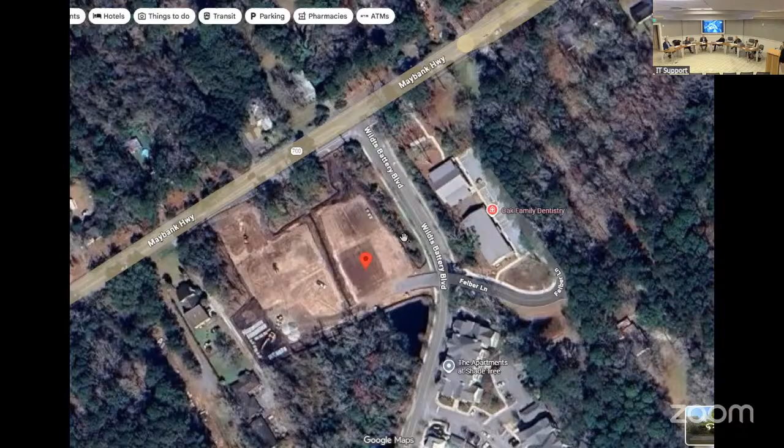Turn over to the presenter. Thank you, yeah, so this will be short. My name's Hunter Thurlow with Leo Project Architect, and I have Jay White with Leo, Beth Brownlee, and Matt Candy with the City of Charleston.

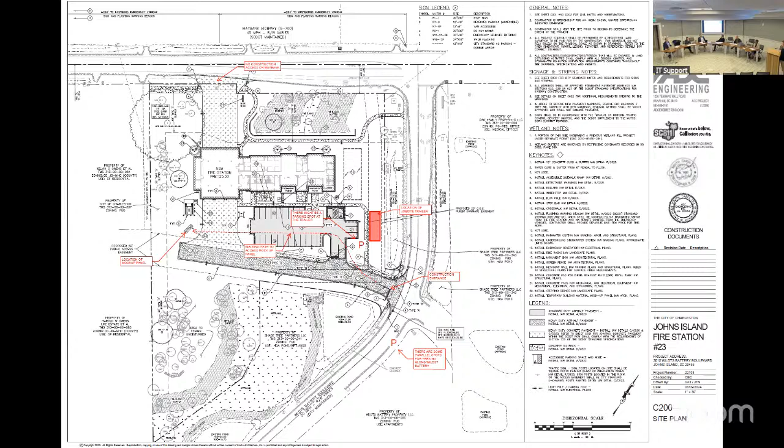I hope all of y'all were able to make it out onto site over the holiday weekend and review the mock-up panel. If you want to skip - okay, some good pictures, additional pictures you all find as well.

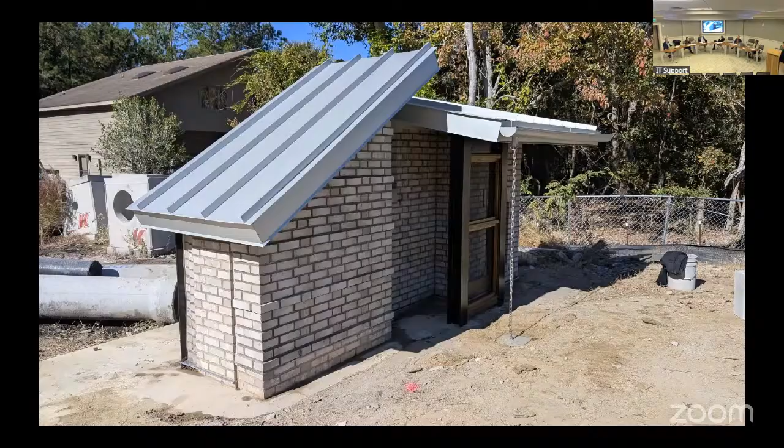We can skip. So just to describe the mock-up briefly, on the left is mimicking the apparatus bay with the steel plate on the far left for the door detail. Then we have the screened porch mock-up with the rest of the house on the right, that mock-up.

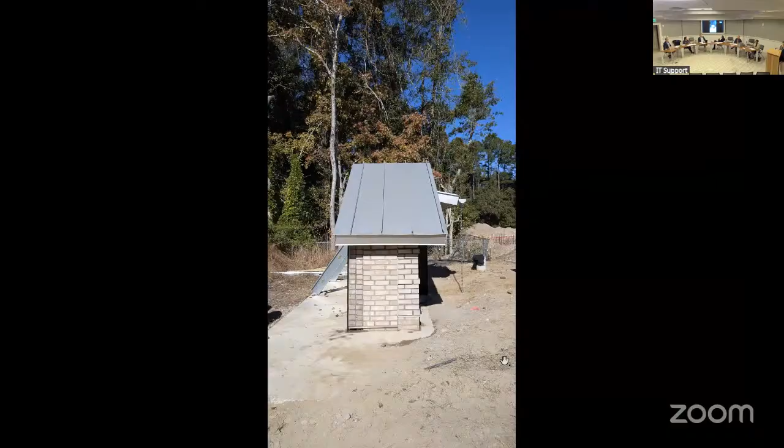I can just go through these if you like. Let me know if you want me to stop or something. On the window detail, we do have the two different types, the double recess and the single recess. Those reflect different size windows, the double being the larger and the single being smaller 3x6 windows.

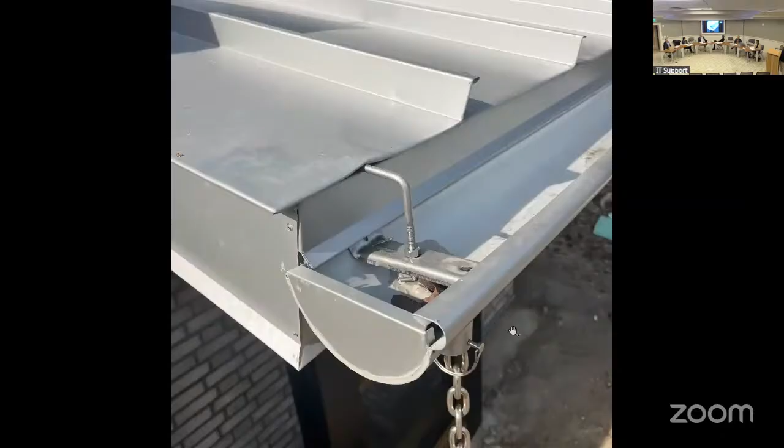Anything further? Yep, thank you. Great. Any questions from the board? Question.

Hunter, right? Yes, I stopped, yeah, right there. And David pointed that out. Thanks, David. Just questioning the attachment of the half round gutter to the building. Is that really how it's detailed, how it's intended to go under the standing seam like that? That's correct.

I've just never seen it done that way. Looks like water would have a tendency to go under that fish mouth where the opening is. What is the reason for that? It was to connect it to the top, mount it here, and then it's be flapped over under the roof. It was to not have visible hangers from the bottom from the pedestrian perspective.

And I guess you're just gonna seal right there. You're just gonna put sealant at that joint. No. Okay.

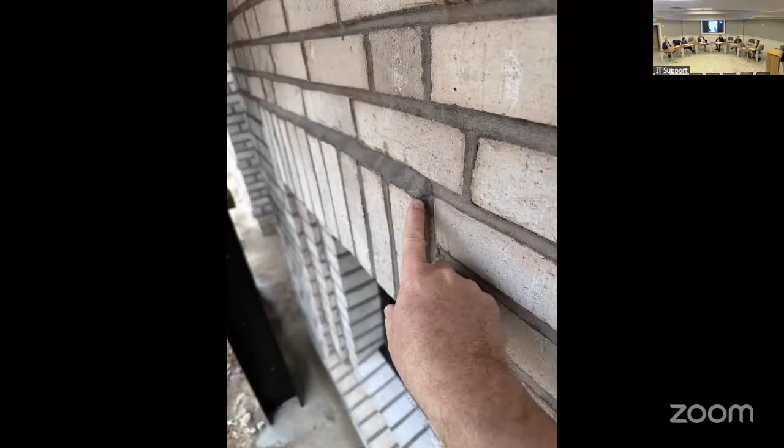So it's built out though. You said so the water doesn't splash back up and affect that, right? Water doesn't flow back into the brick, right around the window. That could probably be accomplished with something a little less dramatic in terms of mortar buildup. I'm not strong about it, I was just curious.

I had another mortar question. I'm afraid I didn't- okay, maybe you can see it on one of these, on that side. It looked like it was on the far side, far right, if you're facing it on the left. Is that a change in color in the mortar? Yeah, just at that seam. I was curious, you can't see it, but on the left side it was like one was beige and one was like a darker gray, and I didn't know if those were options or different parts of the buildings were having different mortar colors.

That picture was taken right after they had finished washing. Oh, no, I was there this morning and I took a picture of it. Yeah, there's a different mortar color around. Yeah, they're very different looking. We'll confirm with the contractor, but I've got all the consistent mortar, it all should be one color, as shown on the front. Yeah, I took a picture today that shows it pretty drastically contrasting, but that's what you meant right here, right? Yeah, I got there this morning.

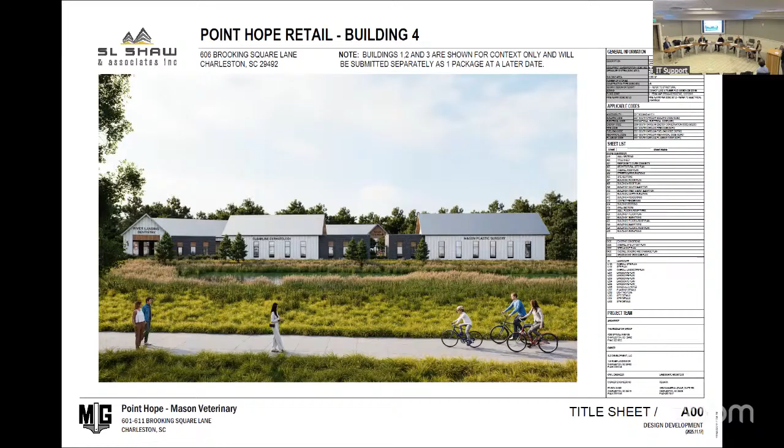If you move to the next slide, please, I'll start with our responses to previous DRB comments, and also include comments we received from the Point Hope DRB board. We have received preliminary approval from them earlier last month.

The first DRB comment was included in the motion. We were supposed to study the infill porch columns and beams in one of the 3 elements that each building has. We looked at the siding color, darkened it, and eliminated the post and beam look, using trim instead. I'll show you that later in comparative elevations.

On this slide, you see our proposed preliminary design at the top, the previous one at the bottom.

The other 4 DRB comments focused on landscaping, and we addressed those. We added landscaping at the entrance to the site, which you'll see on the landscape plans. We've also started coordinating with Design Works on the pond design. It's not on our property, but we'd like a complementary color palette, though that's still in progress. We've also included rain gardens at the rear of the site per the DRB and staff request.

If you move on to the next slide. Another request was that I think we added enlarged landscape areas, as staff requested in the landscape package.

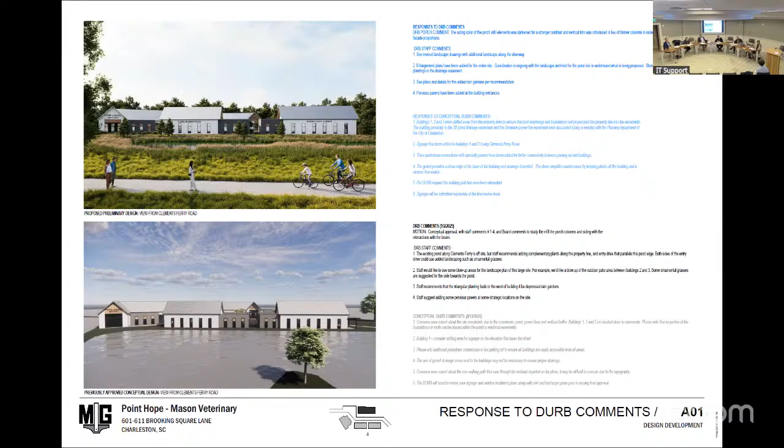The other thing we added was pervious pavers at building entrances. These are all the comments that we addressed.

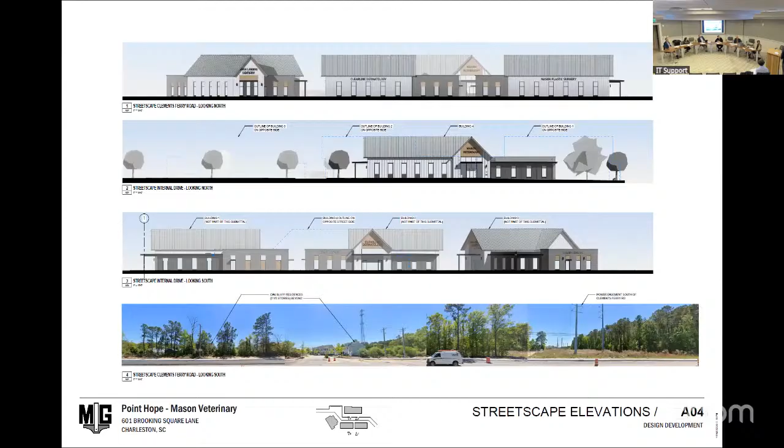So let's move on to other sections and materials. Next slide, please. These are the streetscape elevations that haven't changed much. Next slide. These are site sections that we included.

Here is building 4 at the rear of the site. We had to bring the finished floor elevation pretty high to work with the existing sewer elevation. So we have to deal with some topography on the site in a stem wall situation, mostly here on building 4, but we'll show you how we address that architecturally on the elevations.

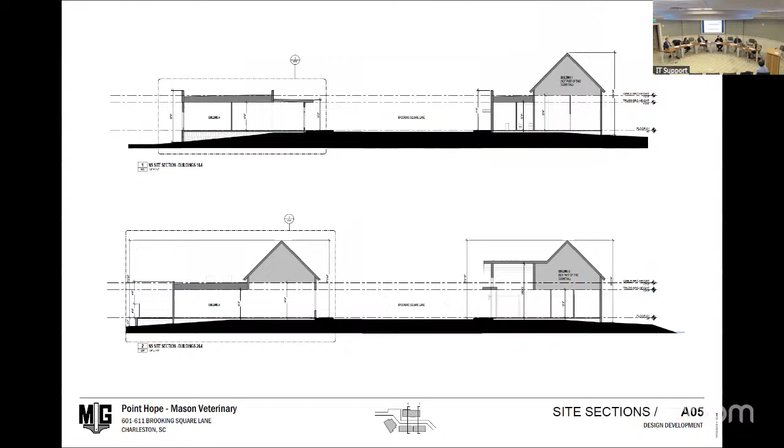Next slide. Here are the main materials we're proposing. It's a pretty neutral color palette of whites and grays with some accent wood.

So the gabled portions of our building design will have fiber cement siding with board and batten, and to give it a unique touch, we're using 1.5 inch by 1.5 inch deep battens to create a deeper shadow line and some more texture. And we have a gray brick. I can show these materials here.

A light mortar. Then for the porch infill panels, we're using V-groove siding. This is just a general material, but we paint it dark gray.

And at building entrances and other accent areas, we're using a Resysta siding that's been used successfully on other projects you've seen before. We're proposing vertical siding above the building entrances.

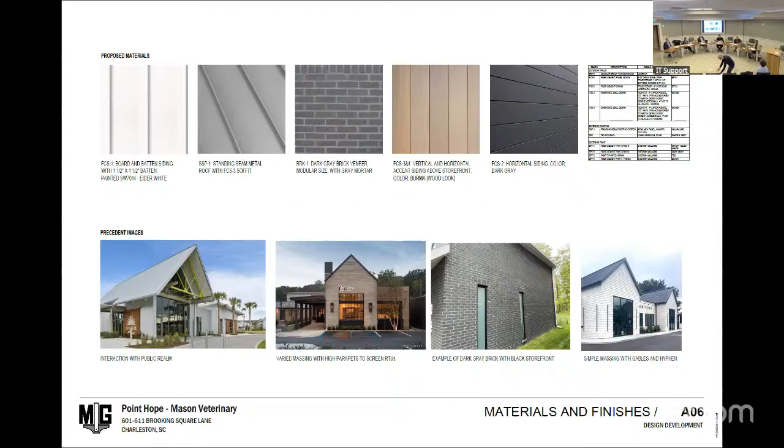We'd like to use different widths, 4 inch and 6 inch, combined randomly to give it a more rustic or organic look, since otherwise the colors don't change much in this composite material. It's also on that material board.

We're also using this material in areas where we can't have floor-to-ceiling storefront because of the medical exam rooms behind. So we're just using a 3-foot high sill infill that's still recessed from the siding.

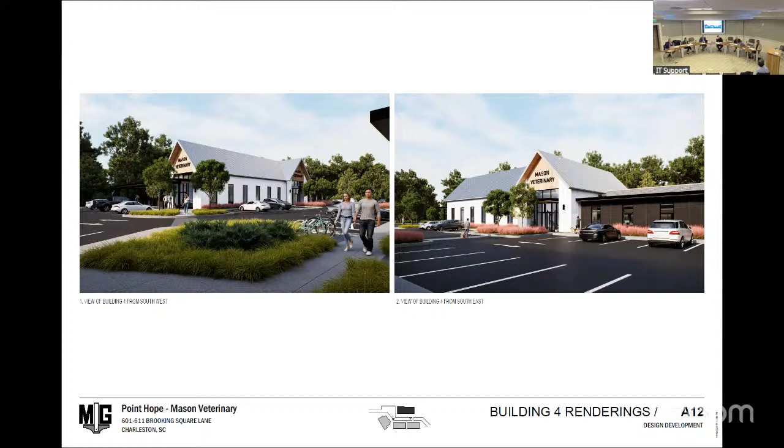These are just renderings of the elevations from the parking lot, and these are previews of how we're applying the materials just described to buildings 1, 2, and 3.

Again, this is not part of the submittal, this is just the context.

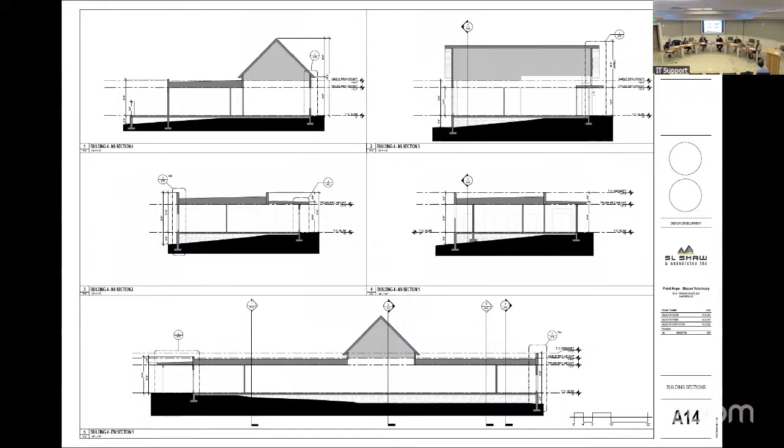Next, these are building sections and wall sections. Feel free to ask any questions if you have any on those.

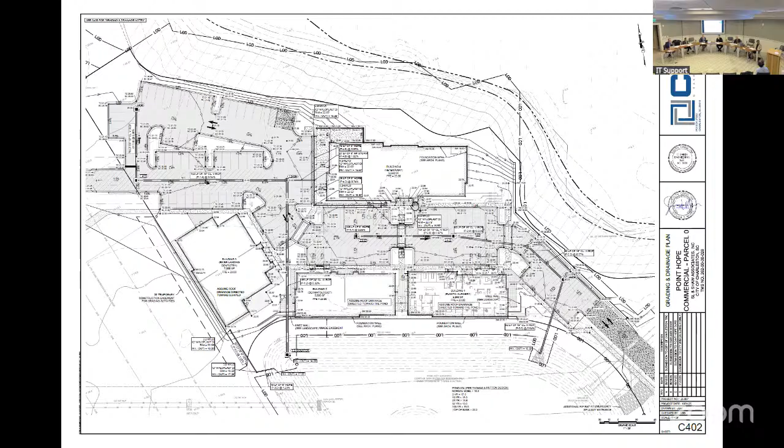If you have any questions, we're open now. We have civil and landscape here to answer anything I haven't covered. Thank you. Questions for the board?

The raised sill on the storefront for the exam rooms, is that spandrel glass in there, or is it an actual painted part, something like that?

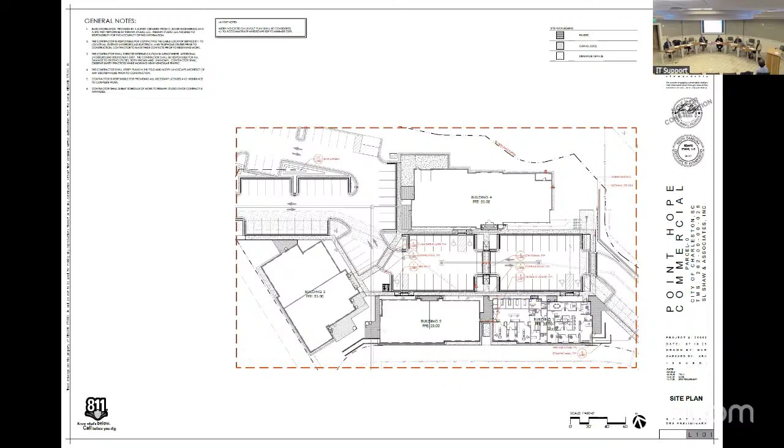At the bottom, this is actually the same V-groove siding that we're proposing on the right side. This is because it's a bed space and the dogs are not supposed to look out and get distracted.

So go back two more slides, please. This and this material is exactly the same material. The board and batten is slightly proud of it. So the storefront and the sill are in the same plane, and then the board and batten comes out of it.

How is that difference in depth achieved, just by the width of the siding, or is there actual framing? We're furring out the board and batten, and this is just the siding directly over the sheathing.

We show the dark color so it looks like the dark storefront. Just so you know, the other buildings have different medical offices with different requirements, so they may have this element at other heights too, but generally this proportion was important to us and that stays the same.

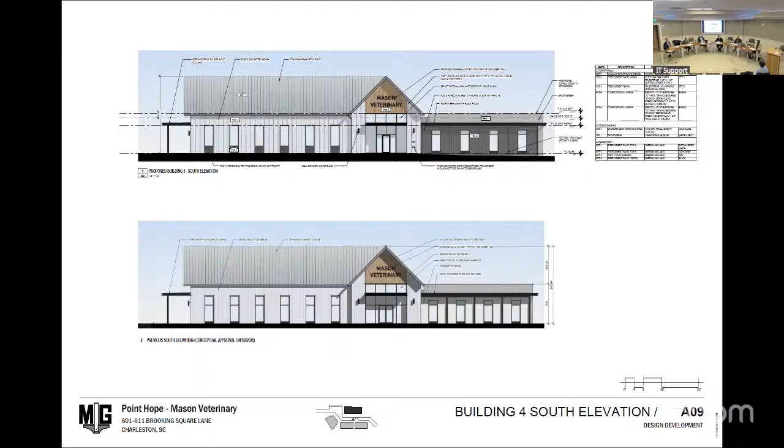Quick question on the site plan. We'll look to it, just a clarification. I think there's one that shows, yeah, the landscape plan is fine.

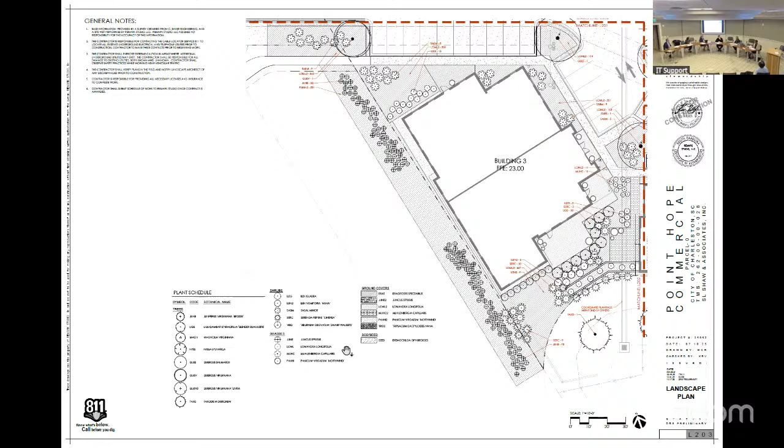I had a question about a fence coming in, maybe towards the entry. It looked like a fence coming in, and then if you go to building 4 landscape, it looked like there was a fence that came in somewhere and it just kind of ended here. I just wanted to make sure I understood what was going on there. Does it kind of end where that deadline is?

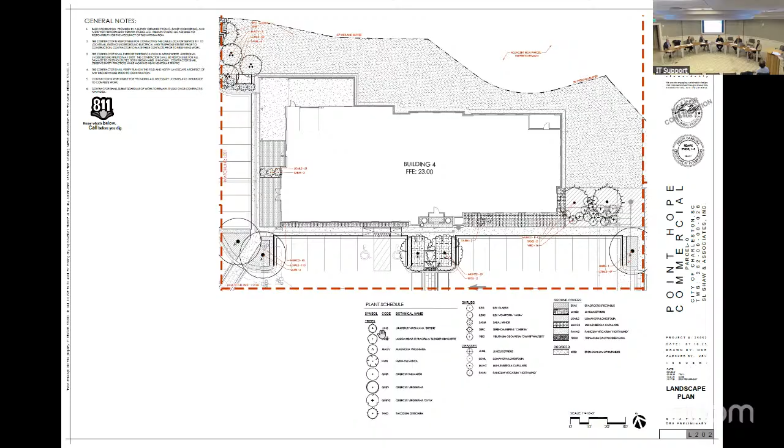We have a lot of grade makeup there, so it's difficult to see here. The landscape plan kind of showed that retaining wall hugging the driveway coming in. Since we've removed the nature trail from within the buffer, we've eliminated the need for the stairs and the extension of that wall. But this portion here alongside the driveway will still be necessary. Once we get closer to the eastern face of building 4, we'll be able to make grade without a wall. And there's a fence, I think it's a black aluminum fence along the top there.

Is that part of it? That is the vehicular guardrail. Okay, and then what, does it just end right before you get into the main pedestrian area near building 4? So it's a guardrail, not a fence. Correct, it is vehicular protection.

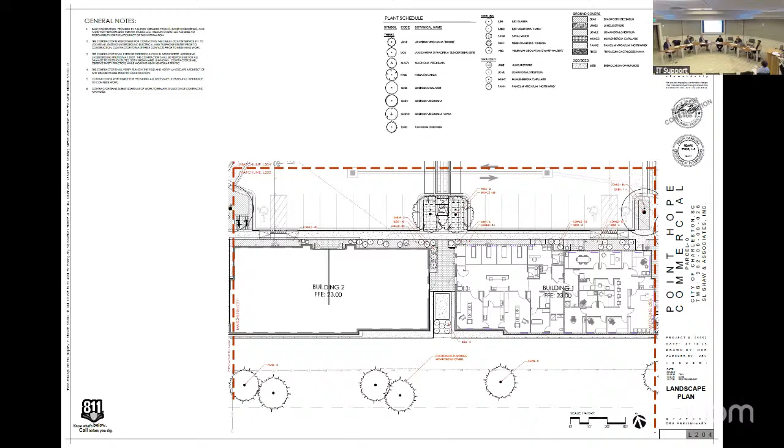There was a fence detail, I thought. At one point we did have a fence because it was pedestrian adjacent to it, but the trail went away, so the pedestrian access also went away. Well, it still showed up in some of the drawings I saw today, so I was trying to figure out what's ending up being there since it had changed. I don't know exactly what sheet, but it had the fence line, and I was trying to see where it ended and tied into that planting bed or not, and how that worked. Understood, the goal is safety, so we'll be sure to rectify the details accordingly.

And then the fence will not connect to the building. That's correct. Okay. It looked like it followed that line right there, that wasn't the plan I was talking about, but just kind of, okay, thanks.

Any other questions from the board? Okay, anyone from the public here to speak on this project?

Staff recommendations, some staff observations. The previous board and staff comments mostly had to do with the site, and these have all been addressed. The landscape plans are looking good. Staff appreciates the added rain garden in the parking lot. The board member who made the previous comment about the porch columns and siding versus the beams has confirmed this item was also addressed. DRB supports the materials for the building as shown on sheet A06.

Staff comment number 1: the variety of sweet gum being specified has less messy fruit than the standard sweet gum, but they still have some fruit. Staff recommends a different tree choice directly next to the patios, but other locations for this tree would be fine, as long as it's not located next to walks. Staff comment number 2: please include the common names in the plant list. Staff recommends preliminary approval for building 4 and conceptual approval for the planting plan. Because the plant numbers aren't included yet, that should be included for preliminary approval.

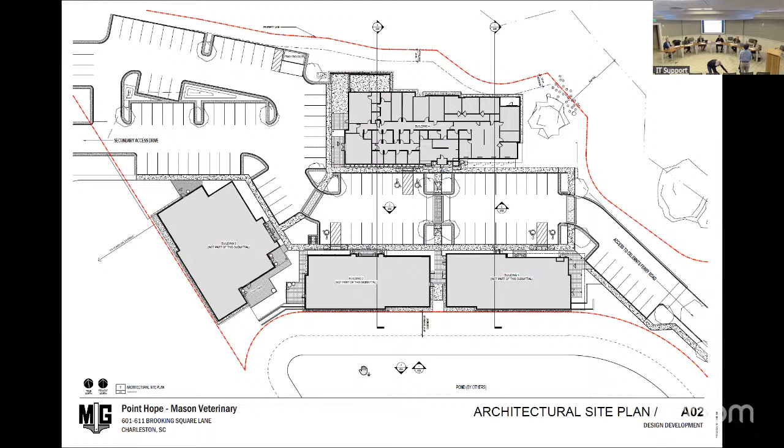It's the Design, use, design. What's the design and use? DURB? Okay, design use review. I think it had use in there. Yeah, it's review. Too many review boards.

Item 3 on our agenda tonight is 1791 Hickory Knoll Way, requesting preliminary approval for 2 one-story commercial buildings.

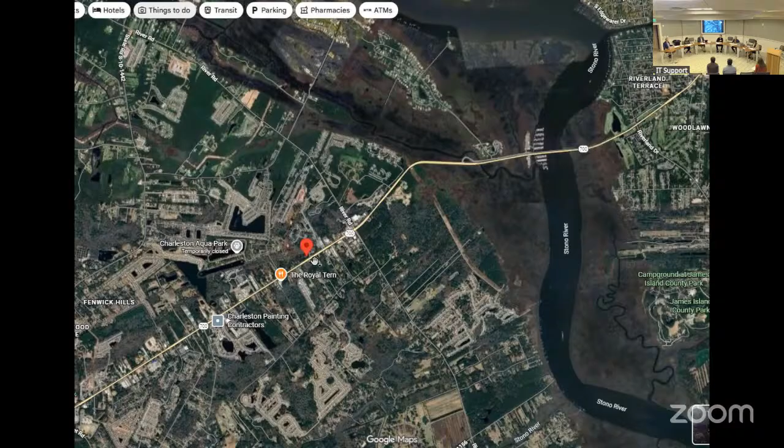Thank you. Just a couple context slides. We've seen this before, but just to remind everybody, it's very close to the location we just saw for the mock-up panel, off of Maybank Highway, at the corner of Maybank Highway and Hickory Knoll Way. A closer view shows the currently wooded site, with Hickory Knoll off to the right.

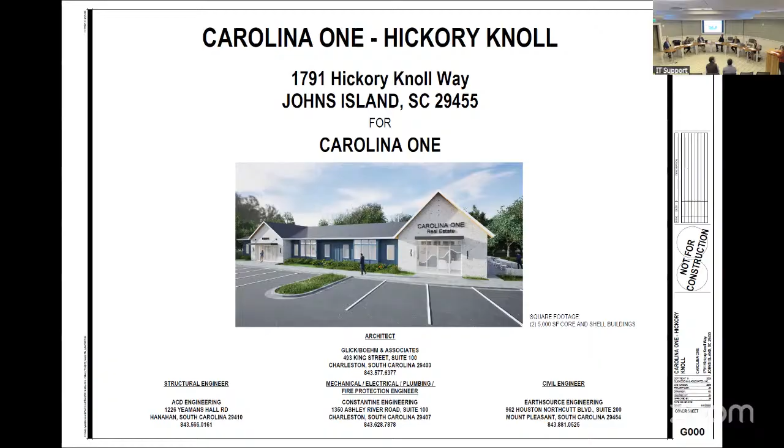Applicant can set that up. My name is Kylie Simpson. I'm with GBA Architecture, here for Hickory Knoll, and we also have Thomas Martin, for any questions. So we're just going to go through a bunch of the comments. If you could flip to page C200.

A couple of the comments made at the last submittal were about moving the building away from the edge of Hickory Knoll. It was originally around 5 feet; we've now moved it over 10 feet from the corner. We also talked about expanding some of the concrete patios on the side. Those were originally around 12 feet, so we opened them up to 15 feet, a little bit bigger, allowing more space for people to walk through.

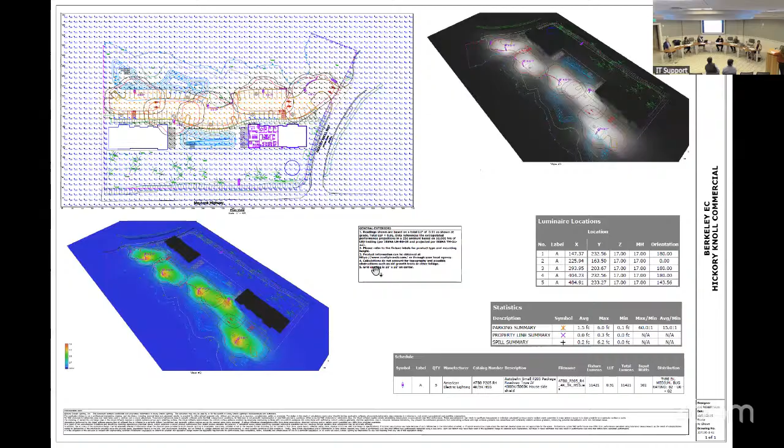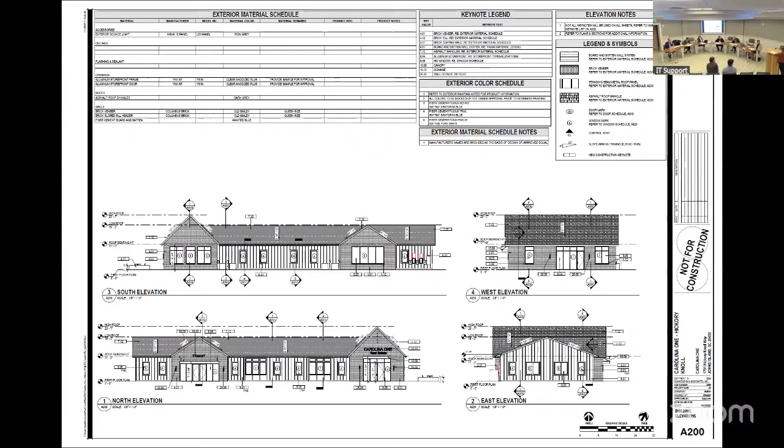If you flip 2 more pages to A200, this shows the updated elevations at an overall scale, and we'll go into the differences we picked up on for comments. This shows the original we presented last time versus the new design. One comment was making the entrances more similar, so we took away the wrap on one entrance, and now they have a more similar canopy look, similar storefront, the same lighting, and the same materials.

The overhang has the same features, but we really wanted to focus on having two different entrances with unique personalities without them being too different, which had come up last time. So we aligned the top of the roof with this elongated piece, but still made one of the entrances a little bit taller, so if you have two tenants, one can have its own personality and the other its own, giving some differences while still being a little similar.

We also really focused on the elongated piece in the middle. We got rid of just the one bump out in the different material, and now it's a little more unison, with board and batten across the whole elongated piece. We still have these two bump outs, but they're more of a bay window, which works with the inside, giving it a push and pull effect, while keeping one similar color across, just to give it a little effect since the building is so long.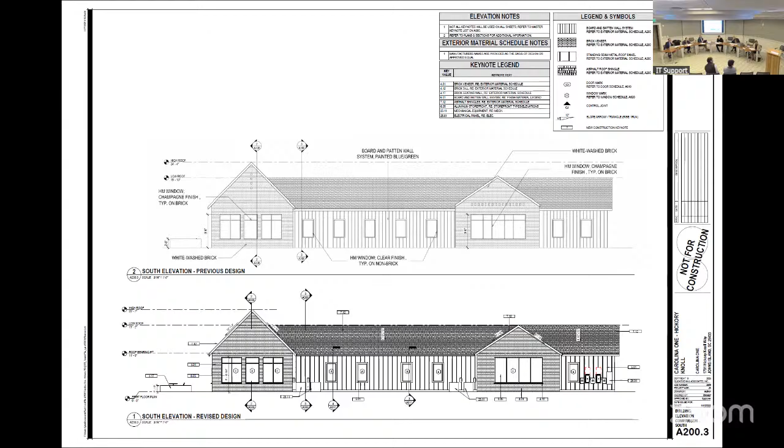If you go to the next slide, this is the back of the building. It's still a little similar, but we got rid of some of the windows to accommodate hiding the mechanical and electrical equipment, working with possibly having multiple tenants. The electrical equipment is on the back, and for the mechanical equipment we moved some windows in because we don't want to deal with as much sound, but we still want to give openings looking over some of the greenery.

And as you can see on the other ones, we brought down the patio, so it's more of a seat height. You can only sit on top of it, it doesn't have the seat on the inside, and the brick would match the building as well, so it all coincides together.

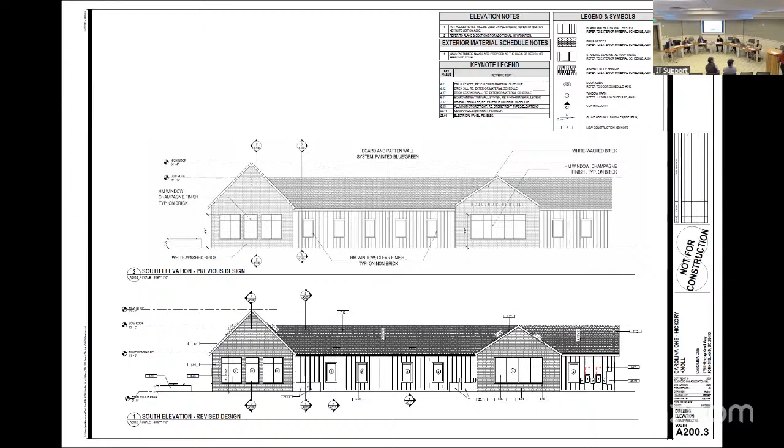If you go to the next one, this kind of shows the other elevation on the west, aligning the eaves and the overhangs, and just trying to make it a little more symmetrical.

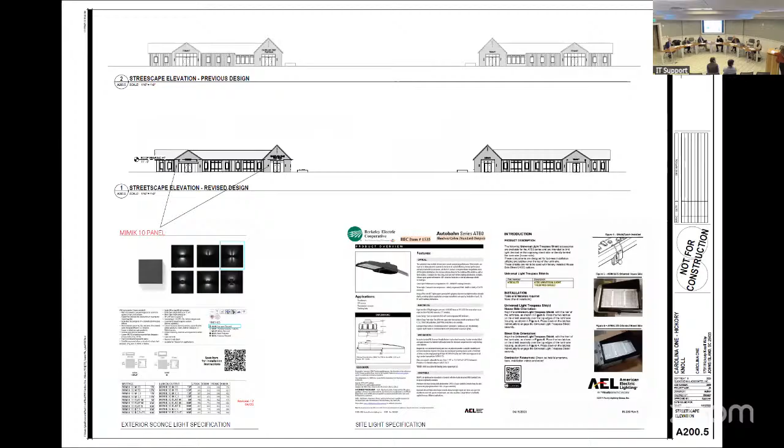If you go to the next slide, one more. This kind of shows the overall updated and revised design, focusing on the two different entrances, having a similar look but a different hierarchical value.

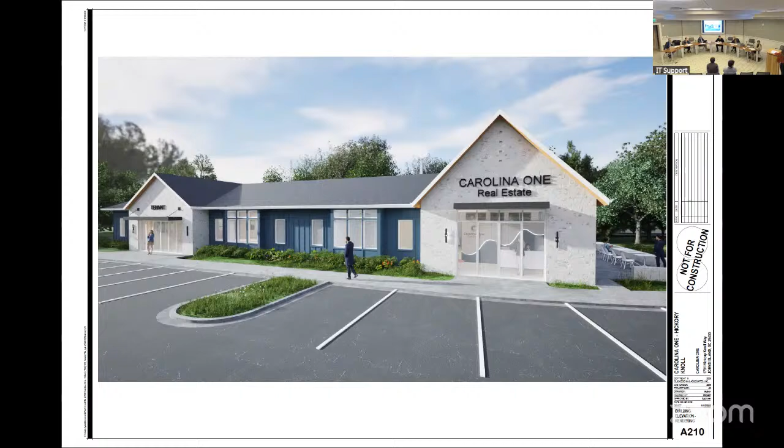And then you can see the bump outs here where it's all the same color across, but it gives it that push and pull effect without being so much like the other one where it was two different colors. If you go to the next slide, you can see the differences.

So this was the previous design that we showed with the two different entrances, and that's the new updated one on the front, which is what people would see when they drive through. We have one color across the elongated piece instead of two different ones. It's the same material of board and batten, and that elongated piece pulls all the way across, with the entrances having their own material and hierarchy, so they stand out.

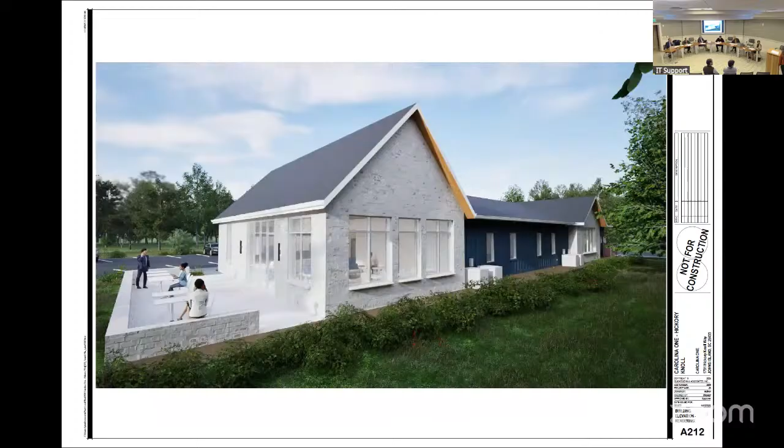If you go to the next slide, this shows the back of the building, showing the brick, and also adding some greenery that will block the mechanical equipment, even though we have that 75-foot buffer.

And you can see all the aligning of the roofs and the push and pull of the entrances a little bit with having that elongated blue piece across.

If you go to the next slide, this will show the differences on really just coloring, updating the brick, and showing how the equipment will sit around the building.

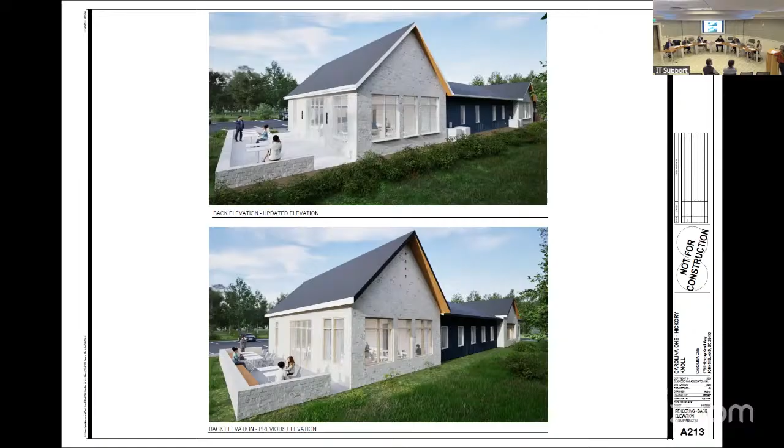Kind of working with the hierarchy of the surrounding area as well. So, if you have any questions on the landscaping and civil, we have them here to answer. So thank you. Thank you.

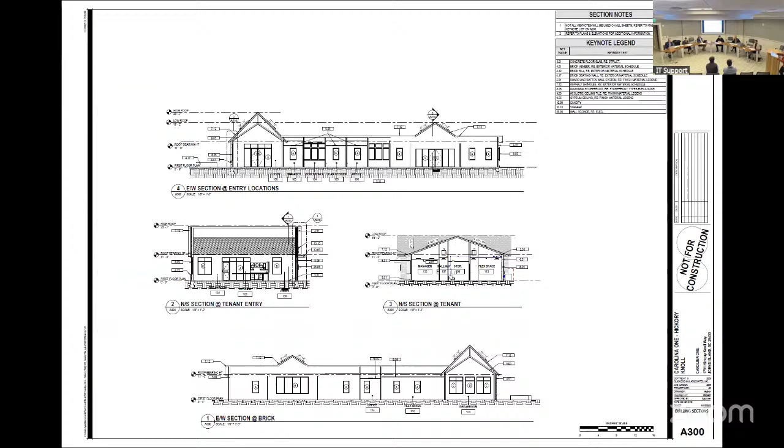All right, other questions from the board? I just have one question, and maybe I missed it on the drawings, but do you have a screen proposed around your mechanical units somewhere? I know you said it's the back of the building, but it's facing Maybank Highway.

Just curious. At the moment, we were focusing on using landscaping as a screening because it's the back, and people wouldn't be able to see it as much with the buffer, so we were kind of using that wall of landscaping across to buffer the mechanical equipment in the back. There is very strong buffer here, very thick, 75 foot.

Other questions? Okay, is there anyone here from the public to speak on this project?

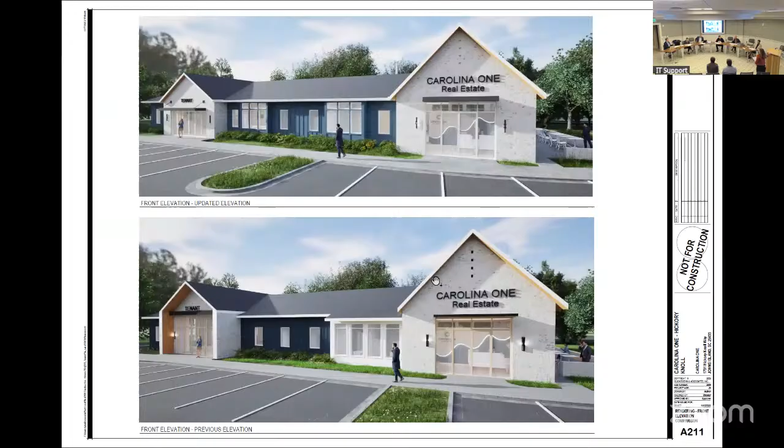Staff recommendations? All the previous staff and board comments have been addressed, and staff recommend preliminary approval with final review by staff. Should I have to clarify anything?

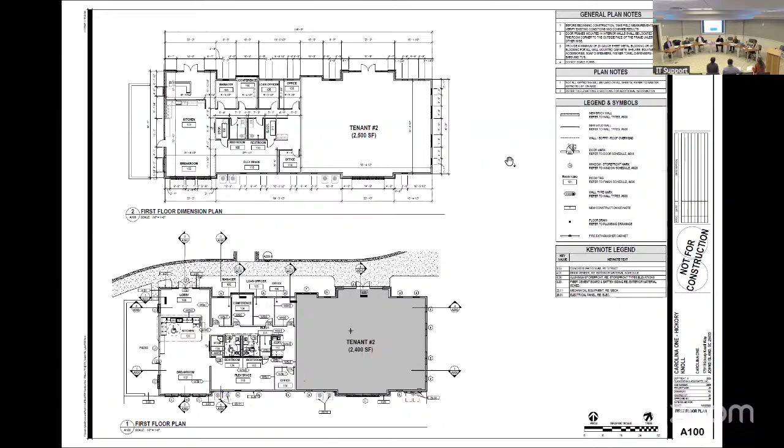Okay, board discussion and a motion. Can you flip to the plant schedule? Nope, the schedule, not the plan. Well, I think you passed it. Yeah, I think you passed it. Sorry, yeah, there it is.

Aaron, how do you feel about philodendron in a commercial setting? Sounds like a loaded question. What's your comment? I want to hear your comment. I just know it can be subject to freeze damage pretty easily. It can get wiped out. It tends to come back, but it can get totally wiped out in a cold snap. I kind of question it as a commercial setting.

We were just thinking with global warming, it would be okay. Yeah, we can certainly swap it out. I think that's a fair observation for sure. That's funny, we still going through? Oh no, I'm done.

Maybe Fatsia, if they're wanting something that's like a big leaf tropical. Sure, let them decide. Yeah, yeah, I agree though.

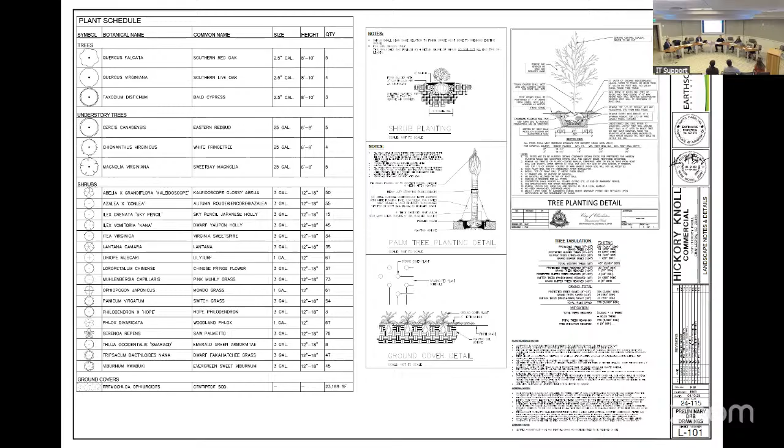I realized I did have a question, for the applicant. On the front facade, you moved from the single bump out to the bay window bump outs. Is this a necessity of the plan, or was it just an architectural thing to break up that section of the facade? I think it was a board comment, wasn't it?

We discussed it. No, we recommended restudying that as a bump out, but then the bay windows were presented as an alternative. And I'm just wondering if that's because those rooms need to be bigger or something like that. It's a conference room and they wanted it slightly larger. Obviously having just one kind of felt off. Unless we were trying to attach, like it was an inset porch at one point and then broke it out to the bay window, and then it just kind of felt odd, so we tried to make it a bit more symmetrical.

No, I don't think they're doing anything to help the facade. I think it would likely be a nicer facade if it was just a clean grid of windows and blue siding. Would that seriously compromise the plan? It would take away, yeah, it makes the conference room smaller. I think the building on the site is very tight, so we were trying to accommodate some of that square footage by giving that push and pull because of the wetlands and trying to have that pathway for driving through.

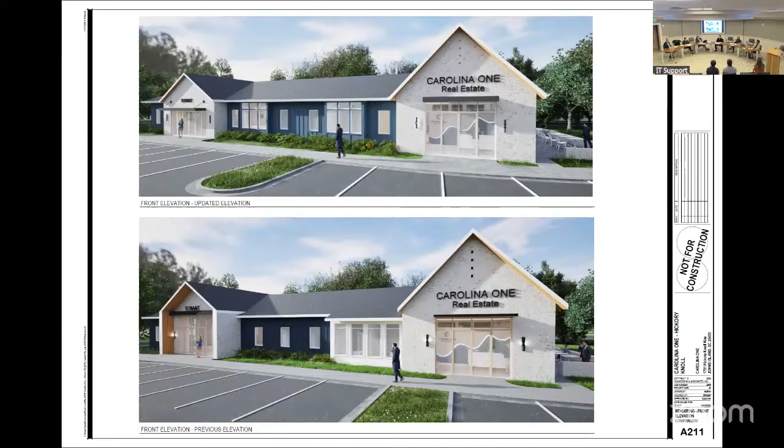If you feel strongly about it—do you feel strongly about the bay window? I don't. Can we look at the site plan? I just want to make sure I understand exactly where that transformer location is, or HVAC. It's on the front, it faces Maybank.

They're over here, right? Aren't they like back here? They're right against the building though. Yeah, just one on each building. Is that—a couple on each, or there's like 4, right? There's 4 on each building. See right here? Yeah, there. So they're right in the corner.

Okay, so the plan there, I'll show the site plan. It's such a thick buffer. Yeah, as long as it covers it, I'm curious. And there's plantings between—I mean, I guess we'll see it when you drive in this way. There's landscape, as long as there's enough landscaping, I guess.

You guys are okay with it? I'm okay with it. Motion it up—motion for approval, preliminary approval with final review by staff.

With the swap out? Oh, let's swap out the philodendron for something else—some suggestions, something more cold hardy. Is that the stuff you used to put in your college dorm room and it grew all over the place? Yeah, a lot of it. There's a lot of types of it. I have a couple in my yard that I did as an experiment—that's pretty cool. They do great as houseplants or in pots on porches and stuff.

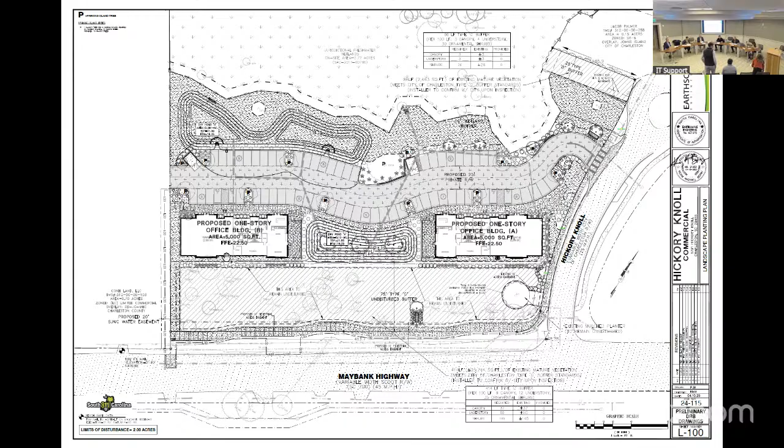Good night. And one final item on our agenda, y'all can go. Stay for minutes? Yeah, one more project you gotta show us. Yeah.